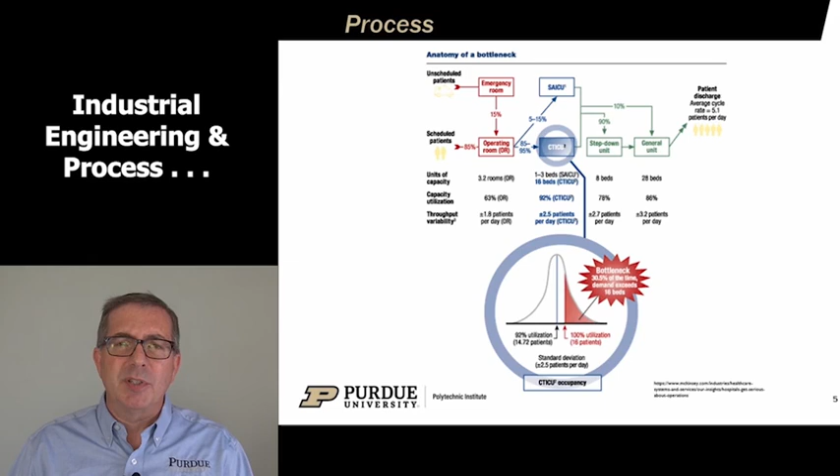Here's some comments about process. Here we've got an example talking about the anatomy of a bottleneck. So a bottleneck, if you think about something coming out of a bottle, the neck of the bottle stops it so it all can't rush out at once. It can only go as fast as it can get through that bottleneck. When you're looking at processes, there's always the slowest process out there somewhere that's that bottleneck.

And how do you make it more efficient so more can get through that so you can have a better process flow? A lot of tools come into that. Developing those tools, using those tools, analyzing processes with those tools is part of what we do as industrial engineers. Statistics is a piece of that. A lot of neat tools and elements there that help you be able to look at what's going on and make it better. So people and process.

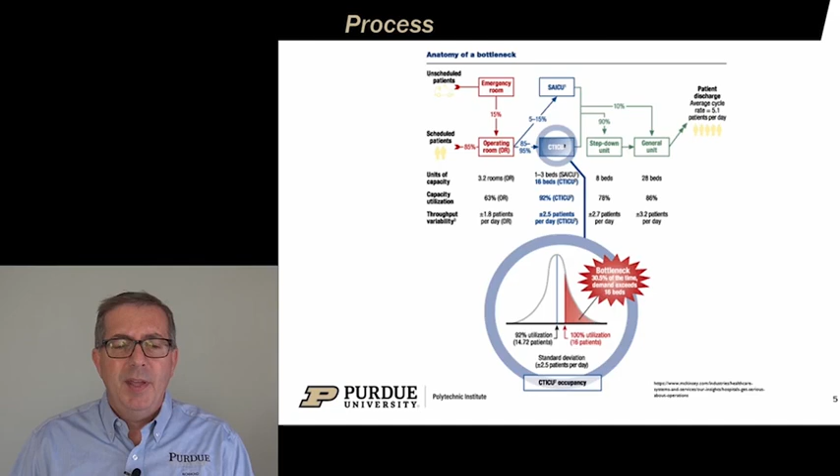When I think about that, they're all connected. The people are connected to other people, and people are connected to what happens in a process, and process elements are connected with each other. It's a whole system of interconnections that are there. How do we look at systems? How do we look at their interactions? How do we look at this impacting another piece? That's a piece of what we do as industrial engineers to make processes work better, and people work better with others and other parts of our process.

How do we get the real data to show this is actually what's taking place so we make informed decisions and wise decisions versus, I like this, let's just do it. There are times where that's great. Often in having the most efficient, effective process, that is not great. So fun things like that in terms of how we look at getting to the data.

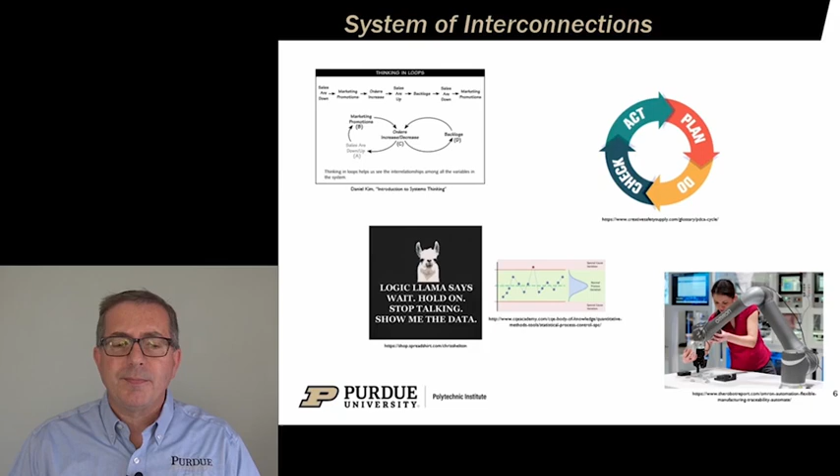So industrial engineering technology is something that's behind what's made. It's how we make things and how we do it in an efficient way. It's a behind the scenes type form of engineering. It's not the glamorous, I'm an aerospace engineer that just designed this part of a spacecraft that's launching with SpaceX.

That's cool, but what are all the things that go in behind that so that it actually comes into being and it really exists and it's done in a way that's efficient to do? That behind the scenes is what we do as industrial engineers. There are endless possibilities of how this can be applied in lots of different kinds of organizations.

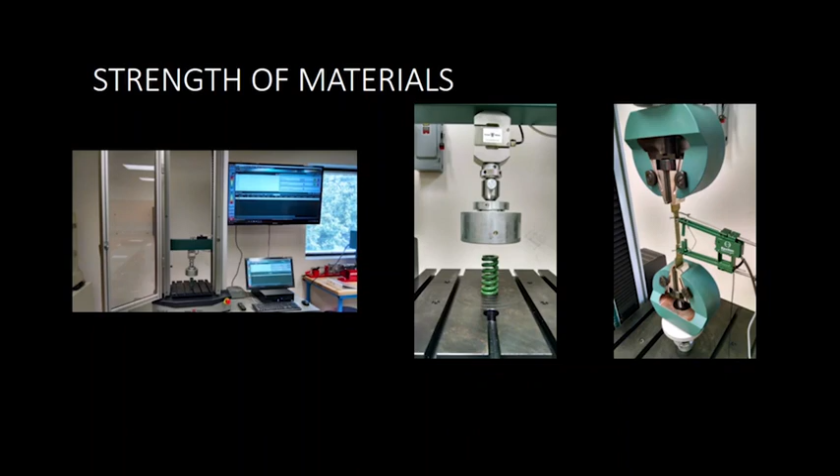First off, we have strength of materials. This is where we do destructive and non-destructive tests. The names are just like they sound. So on the right there, you can see a tensile test. That's where we pull a material apart until it begins to yield and then eventually fracture and fail. And we measure that the whole time, and then we can output it with our software as stress strain curves.

You can see on the left, we have our UTM. That's a universal testing machine. It can push or pull with about 11,000 pounds force. And in the middle is another simple lab that we do. It's a spring rate lab where we can test the pounds required to compress a spring every inch.

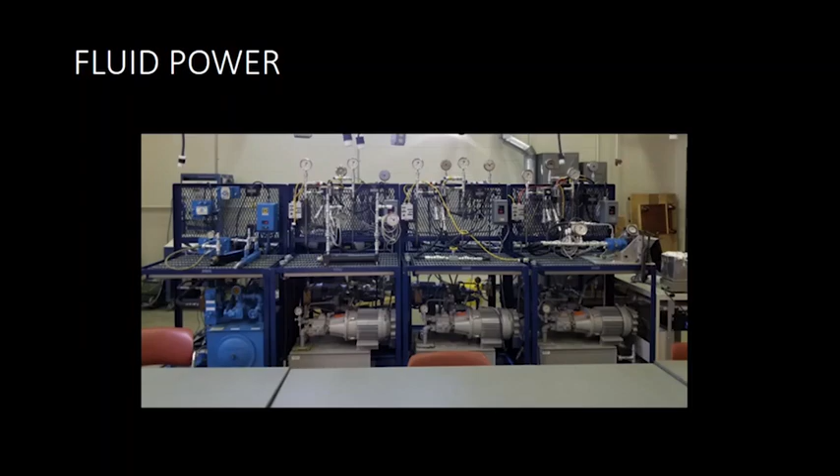So with these, we can go back to first principles like pressure equals force over area, and then build from there and show all of the fundamental concepts of fluid power. This is one of our experimental setups. This is a fluid power driven motor that has an air brake on it, similar to what you would see on a semi truck and trailer.

And we can measure the flow of fluid in and out, the pressure in and out, and then we can see the change in the RPM of the motor as we apply air brake pressure to the motor. And then we can also measure its temperature and see that the temperature increases as we apply the brake.

And in the labs, we calculate all this ahead of time in theory, and then we run them all hands-on and verify the theory with lab practicals.

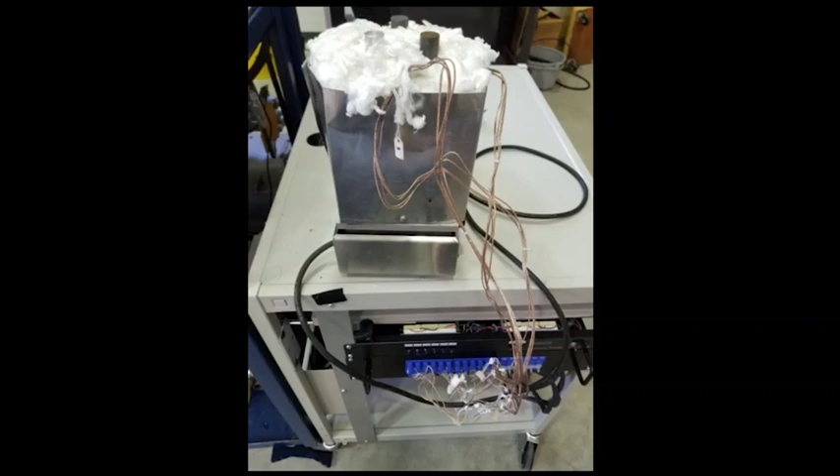This is an example from our thermodynamics lab. That's heat power. With this one, you can see at the top there, we've got three different metal bars: one's aluminum, one's steel, and one is copper. And there's a hot plate at the bottom, and we turn it up to about 300 degrees Celsius. We allow all three materials to reach steady state, then we can look at the steady state curve and the steady state temperature at varying heights up from the hot plate, and compare thermal properties of the three different materials.

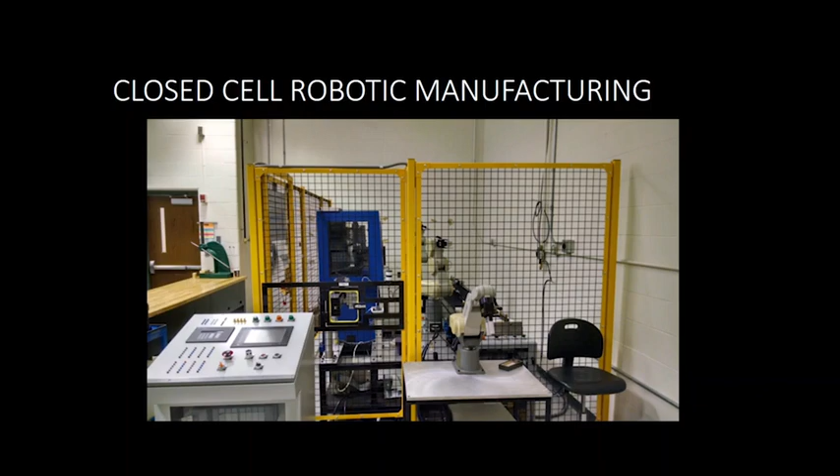So it's about 90% autonomous.

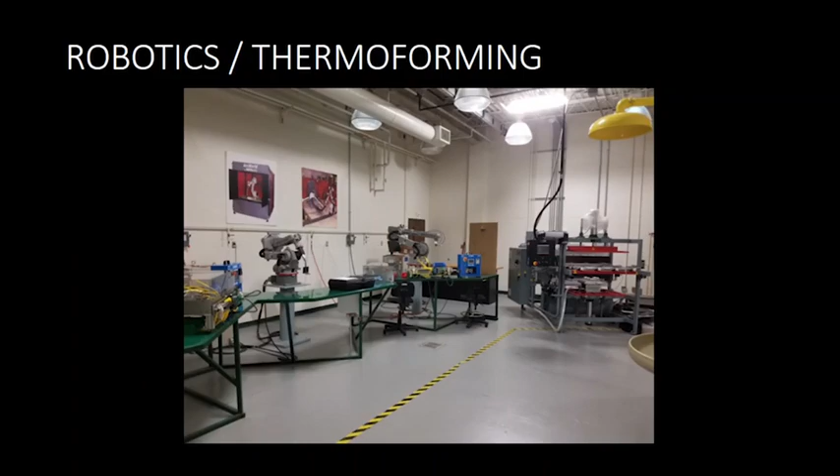Here we have another room. This features some more of our robots, more of our lab setups, and also our thermoforming machine, which is involved in heat power labs. We also have a machine shop.

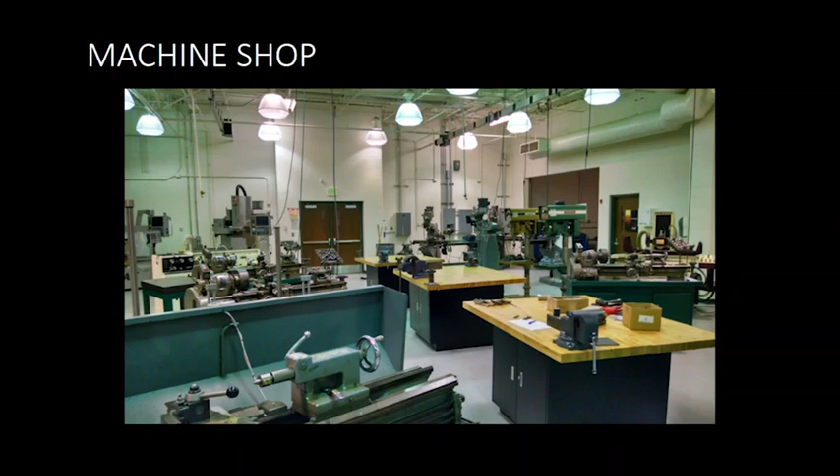Here you can see all the traditional manual machines: lathes, drill presses, Bridgeport mills, surface grinders, and we also have CNC capability. We have a CNC mill on the left, CNC lathe on the right. The students go through, they learn how to 3D model, they learn how to create CAM tool paths, and then generate G-code, load the G-code into the CNC machines, and make parts.

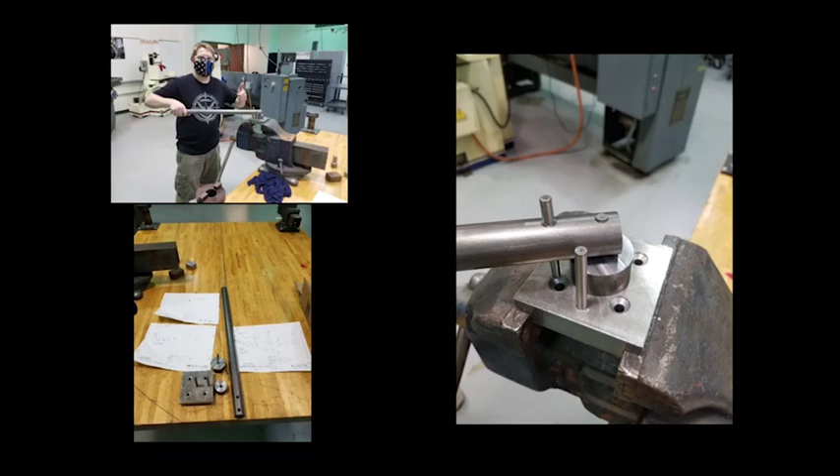Here's an example of a student project, one from this semester. This is for a rod bender. The student's project here was to make a rack for all of his fishing poles, and he wanted to make some intricate bends in half-inch steel. So he created this jig in SolidWorks as a 3D model, generated all the blueprints necessary, and then we machined all the parts, put it together, and tested it.

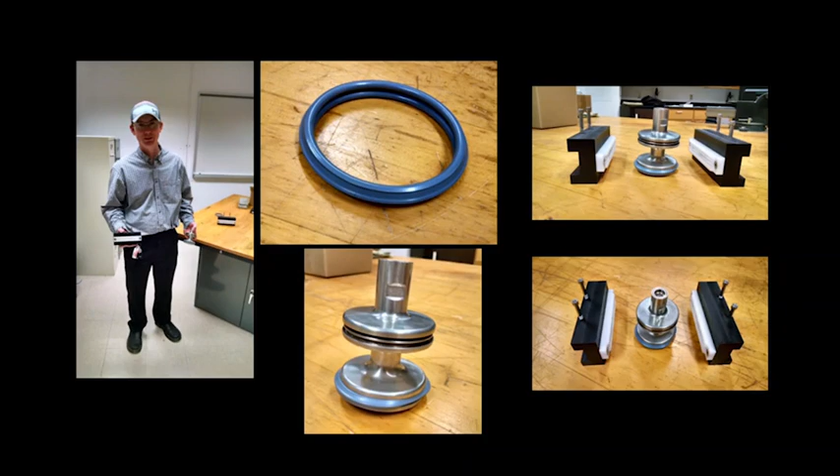Here's another project from another student of mine. In the middle at the bottom, you can see a stainless steel plug, and above it is a gasket that needs to go onto the plug, and it needs to be changed about every week at the factory he works in. Their method was to do it by hand, which was really rough on their fingers, and people would sprain their fingers, try to use pliers, and end up breaking the O-ring.

So he designed a jig that could be used in just a standard vise to roll the gasket onto the plug without any need for fingers. It could all be done mechanically through rolling action. He designed that in my MET 245 class, and then we machined the jig out of Delrin plastic, assembled it, tested it, and then he took it to work, and they still use it.

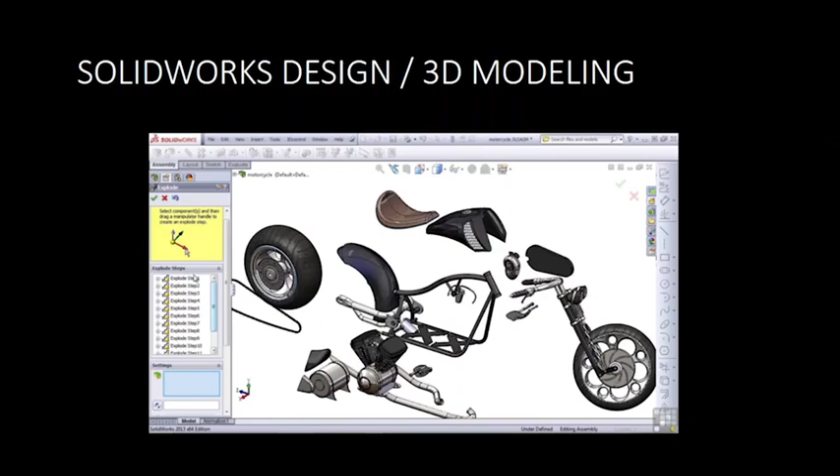I teach all the 3D modeling computer-aided design classes here in Richmond. This is an example of SolidWorks design 3D modeling. Here's a 3D model of a motorcycle one of my students made for his project. He modeled every piece and then took it into an assembly view and then an exploded view. All the parts can be seen here.

We also do bridge modeling. We can do different variations of trusses, different variations of triangles, and see which is the strongest. We try to balance weight with strength, and we can do that easily in SolidWorks without having to actually build anything. We can hone our design and then build it.

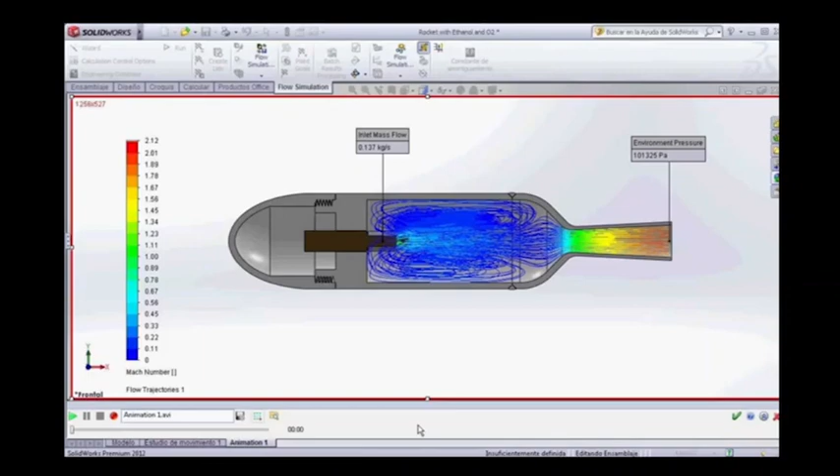Here's another example of dynamic modeling. This is for a rocket nozzle that one of my students designed. Within it, we could model the ethanol and O2 particles, and generate paths for them to see the flow efficiency of the nozzle. We could also see the Mach number, or the speed or velocity, generated by the nozzle. Blue would be the essentially zero speed particles, and red would be Mach 2.1 coming out the business end.

Hello, my name is Rex Kanu, and I'm an associate professor of practice, affiliated with the Mechanical Engineering Technology program at Purdue Polytechnic Institute in Richmond.

I'd like to congratulate you for wanting to attend college or university, particularly for looking at Purdue Polytechnic Institute for your choice of institution, and also for considering the engineering technology program as your possible career path.

For this presentation, I will be focusing on the mechanical engineering technology program. We do have two other programs, robotics engineering technology and engineering technology, but my main presentation will be just focused on mechanical engineering technology.

We do offer a bachelor's degree program in MET. For last year, the median salary for MET was about $88,000, according to the U.S. Bureau of Labor Statistics. Also, the job outlook for the next 10 years looks quite promising at 4% annual growth, which is suggested by the U.S. Bureau of Labor Statistics to be as fast as the average for all occupations in the U.S.

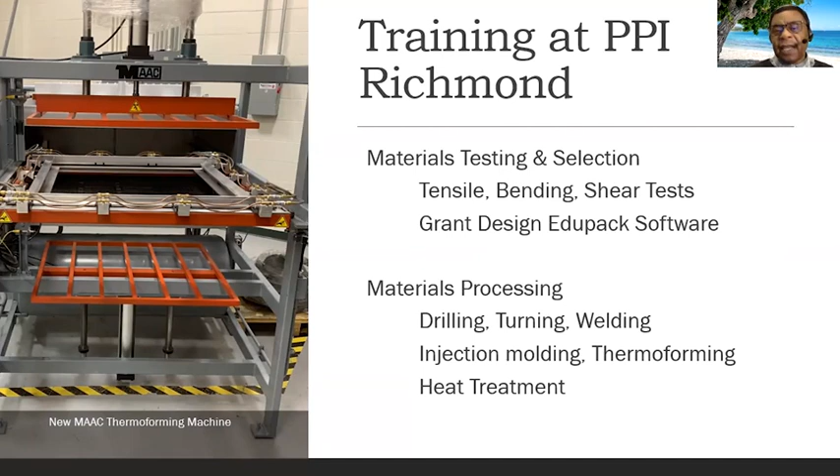In addition to the hands-on training, processing and testing, we also teach courses that give us the fundamental understanding of these materials, how they behave, and how we can work with them to achieve our end goal, which is a functional material that meets the need we're looking for.

So we do things like heat power, which is thermodynamics. How do materials react to temperature? How can we use temperature and pressure to make sure that the material does what it's supposed to do?

We look at fluid power, which is hydraulics. If you look at forklifts, they actually use hydraulics to move the forklift up and down and move loads, because electrical systems cannot do that as efficiently as hydraulic fluid can. So we show them how you can size a pump to make sure that the fluid has enough energy to move a load from point A to point B.

We look at strength of material. So if you're designing stuff for, say, forklifts, what kind of material do you use? What strength do you need in order to move a load from point A to B? And so we teach students strength of material for plastics, for metal, for ceramics.